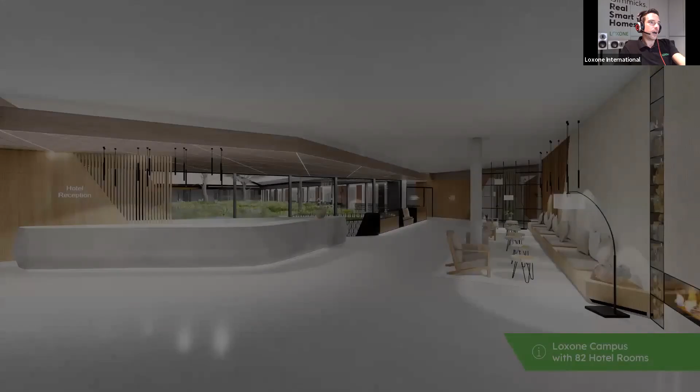As you can see, the nice hotel entrance, 82 hotel rooms. The auditorium, as you can see, is very large, 30 by 20 meters I believe, with a high ceiling. So it will be a nice project.

Other than that, Loxone is not only smart homes. You see smart homes beneath me, we've always done smart homes, it's our thing, we started with it. For us, it's tech, it works, we have the know-how, it gets updated every time - like yesterday you get new functionalities. But we know what the smart home is and what it needs to be.

But for years already, we're also busy with bigger projects - special or commercial projects. Hospitality: we had a hospitality release this year with some very nice products like the Miniserver Compact and the Touch Flex. So we have a solution for bigger projects like apartment buildings with maybe 100 apartments, or commercial projects where different smart homes need to communicate with each other - like this one, Tesla for instance. It's something they're putting together with whole grids of homes, and they all communicate with each other.

But you have nice projects like this, also multi-dwelling units, MDU units. That's the thing we've been busy with for a few years now, because not only those smart homes, but all those projects with apartments, they need a solution too. Why do they need a solution? They're being told by the government to reduce CO2, other costs, energy. You can't just make projects like that with nothing in it that's going to help a little bit for that energy or environment.

So this project here in Belgium, it's 10 kilometers from our office. It's 71 apartments, and all those apartments have their own mini server, and they are all connected to each other with intercommunication and also programmation. I will talk later, we have a function since a few months, it's called the multiplicator. So it means you make a program for all those apartments or apartment types.

There they have three types: one bedroom, two bedroom, three bedroom. They make a programmation for three bedrooms, they send it to all those 71, actually 74 mini servers because there's 3 for the buildings also. They send it to all the mini servers, it's programmed, and then afterwards they just check out the rooms. They can program all that project, a basic auto configuration, in like a few minutes for instance.

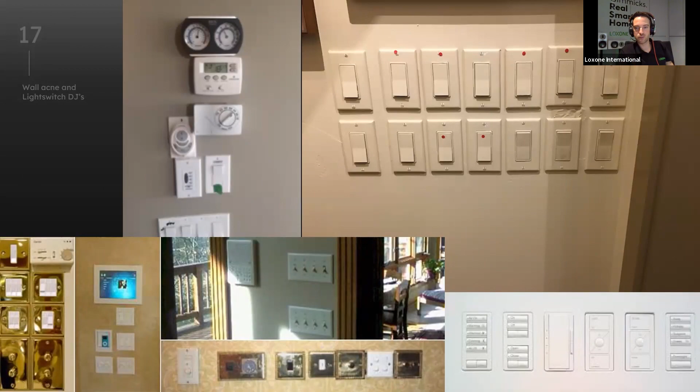You get these things, it's unbelievable. You get stuff for your climate control, your ventilation measurement. You get a lot of screens, all those buttons with some stickers on it. It's pretty nice - don't think so. You paid for a nice button, but you have to put a sticker on it. So we're not gonna do it like that.

The next thing that came on the market, that was version 2 smart home. And then you had the Internet of Things exploding. Also Alexa, speech control - you get all those companies that make standalone solutions for the climate, for your sun shading, alarm systems, lighting. And they all say, here is all the hardware, put it in, start it up, you get your app and you can control everything and you have the best smart home in the world.

Not. Again, if you have to take your smartphone, search for the app to control something or to change something, it's again not smart, in my opinion. So for us, we are the next step in that story, and that's the future of automation.

So we automate. We also have other functions like speech - you can do Apple HomeKit. But for us, it's an extra, it's a nice to have feature. It can be that you walk into a room and you have to shout to it to make the lighting go on - that's not our main goal. It will be there, the light, if you go inside. How? I will show you in a few minutes, about the controls.

I say automation, hey, everything works itself, you don't have to do anything, but a button is also needed. Also in a smart home, you need to be in control. You need to be the boss of your building or your home. But not in the way as we saw earlier with all those different buttons.

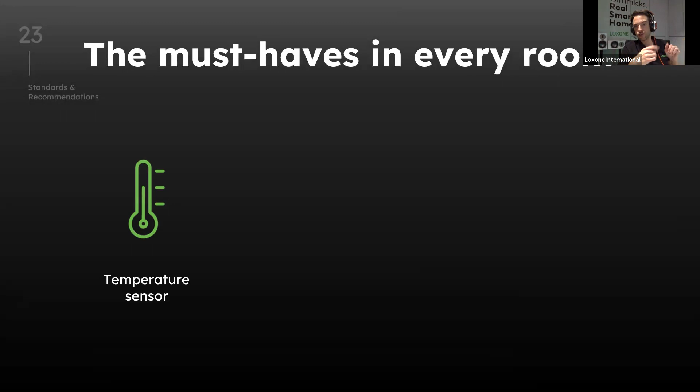So the must-haves, as I told you, we talked about the Loxone Touch. There is a temperature sensor in there, which is also a must-have for climate control. A presence sensor, as I said, in every room. We have door and window contacts, and we can add extras if you want, of course. But those three make the good base of a Loxone smart home.

If you put in all those things, the Loxone Touch is standard for easy control, climate, and safety functions, because the temperature sensor can also detect 50 degrees in a living room. That's not right, something is wrong, and it will give a notification in the app. So the presence sensor and door window contact, if you put it in, you have a good basic installation with more than 60 functionalities.

About the hardware, we move a little bit to this topic because I think it's also interesting.

I have a question: do you have a shut-off valve for the water intake in case of a water leak? In our own product range, we don't have a valve like that, but there is a solution. We've had it for years. I even wrote a blog about it with a small program. You just take a relay, put any valve after your water meter that can be controlled with the relay, and you have the solution. We have the fire and water alarm in our auto configuration. You just connect the relay to it. If the alarm goes off because there's water, it will close. Any valve can be 230 volts or 24 volts, it doesn't matter. With the relay, you can do everything.

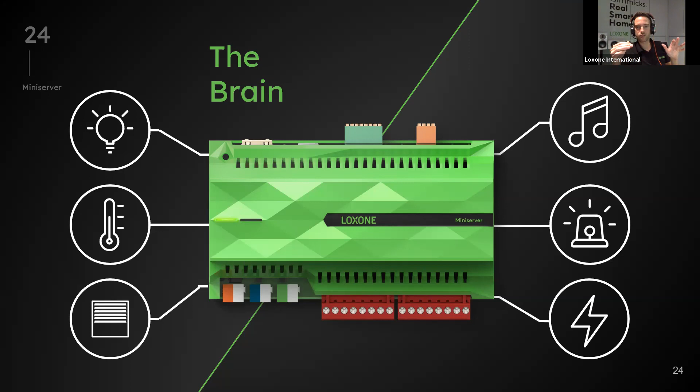So the Miniserver, the heart and brain of our system, has a lot of functionalities on board. We have connections, of course a LAN connection, because we need to be on the network to go outside to your app or programming from outside, and for updates.

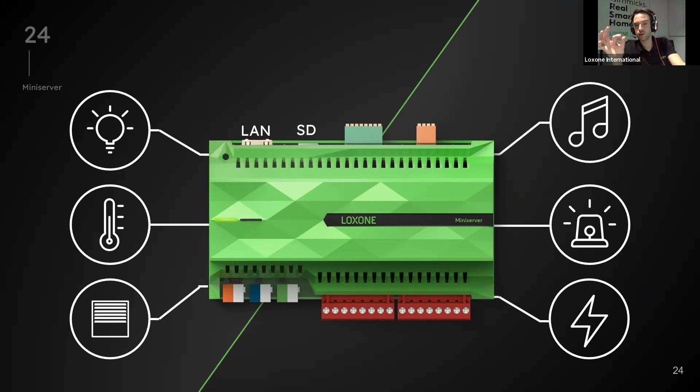We have the SD card where all the programming is stored, and digital inputs. We have 8 digital inputs and 4 analog inputs. The 4 analog inputs can be changed in the software to digital, so you actually get 12 digital inputs. These can be easy for window and door contacts that have to be cabled, like in a new home. If there's a design issue and they want contacts built into the windows, we can use those for triggering the alarm or other functionalities.

Another question: at the wireless connection level, does Loxone integrate with Zigbee or Z-Wave? No, we cannot natively integrate products from Zigbee or Z-Wave. It's around the same bandwidth, 868 megahertz, our own air signal, so it's a little bit similar, I think. But you can't connect those straight away. Why not? It's very difficult for us as a manufacturer to give warranties on other products from manufacturers we don't have a cooperation with. So it's very difficult, but there are other possibilities.

We have our own air products. That's the best solution, but in this phase we cannot do things like this if there's no cooperation. It's a hard part, then. We could do it, but it's just not possible. If you do more than 200,000 projects, and you need to give a warranty on some project to a client who needs a warranty, you as an installation partner want a warranty that it's going to work if you install it like that. So that's something we like to give on our products, our story, our cooperations. We can give 100% warranty, it's going to work.

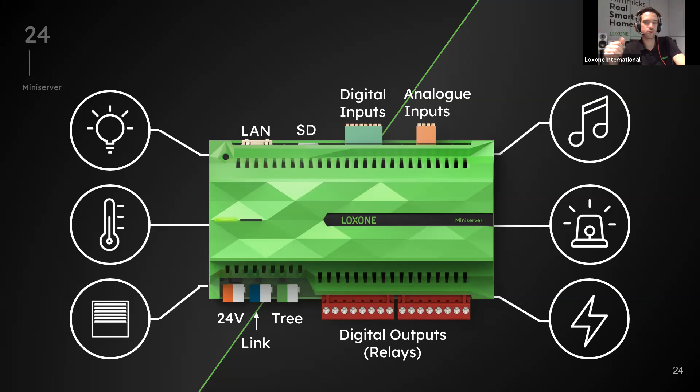We have the link, that's for connecting in-out extensions or other gateways like Modbus, RS485, stuff like that. We have our tree, it's for the periphery in the rooms itself for things like touches, sensors, our tree lighting, and this tree branch can already accommodate 50 products. So you can already do a lot of things with one mini server. It's also a Modbus server, the mini server, so Modbus TCP IP can straightly connect things through the network. So that's something extra you get. It's also HomeKit compatible. We're, I think, the only smart home manufacturer worldwide that is Apple certified for our mini server, HomeKit, and also for our audio server, Apple AirPlay is also certified. So that's the mini server.

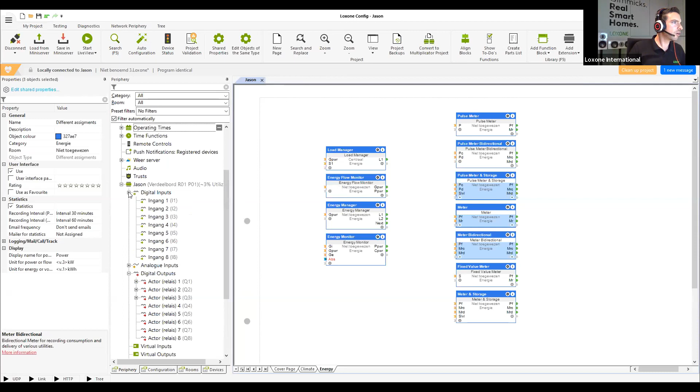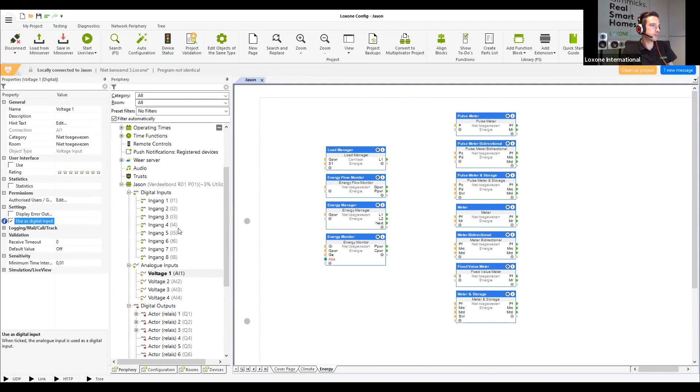Another question: how do the analog inputs get changed to digital inputs? That's very easy in the config software. I can show you fast, because otherwise later I'll maybe forget it. Let me show you very fast if I can stop the share. Where is my config? Okay, so this is the config. We have here our digital inputs, as you can see. You can also set it as a frequency counter and stuff. Then you have the analog inputs, and there you can use them as a digital input. Click it here, it's fine, like that. Save it in the mini server, and this analog input is a digital input from now on. That's it, easy as that. So let me take back, where is it here? So everything, if we make stuff like that, we make it easy. It doesn't have to be difficult like that.

One important thing also, we're not a cloud-based solution. Why is it important? It's for your own safety. It's a smart home, and all that stuff that happens in a smart home could go outside, maybe to a server. It gets saved there, leaks on the internet, privacy issues. We don't want that, we stay away from that. We don't use a server somewhere where we know everything about you. The other thing is keeping a smart home running without the need of a server somewhere else, because with a cloud-based system, if the server is down somewhere in another part of the world, maybe your smart home doesn't work anymore, or some functionalities don't work. So with us, you pull the plug from the internet, and the mini server and all your installation just keeps on working, because it's inside the mini server on the SD card. So that's cloud-free, it's important for our story.

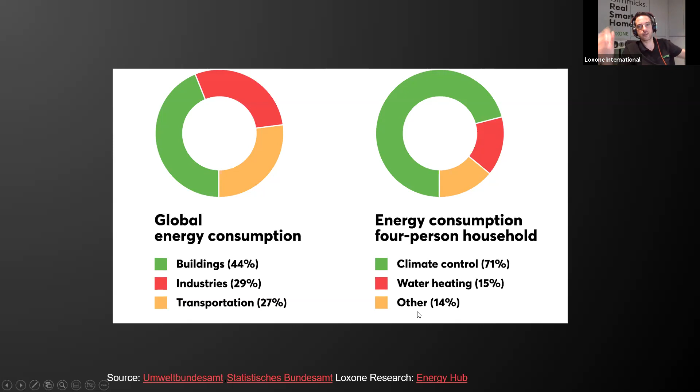Also the water heating, of course, for washing and stuff like that. Other things like multimedia, TVs, and lighting are included too. So here you can see more than 25,000 kilowatt hours per year in a four-person household.

Like I said, you can save a lot with water heating. A lot of installations in new homes are still built with boilers that constantly turn the heat on and off, especially when working with an outdoor sensor. It cools down in the evening and starts working, but the next day it's warm enough again, so it heats up for nothing—you lose a lot of energy. You can save up to 15%, and that's the 15% you actually use.

With climate control, as I said, you can save up to 50%. It's the same story with heat pumps, always going on and off. That's not how it should work. You need the heating to stay on but adjust a little higher or lower, not constantly on, off, on, off. It's also not good for the appliances, plus you lose a lot of energy doing it that way.

Other electric features—presence control, LED lights, lighting—you can save a lot there too. Especially our presence sensor is the main part of that story that will save you a lot. It sees what is happening in the smart home, in those rooms, what the rooms need, and it decides what is going to happen.

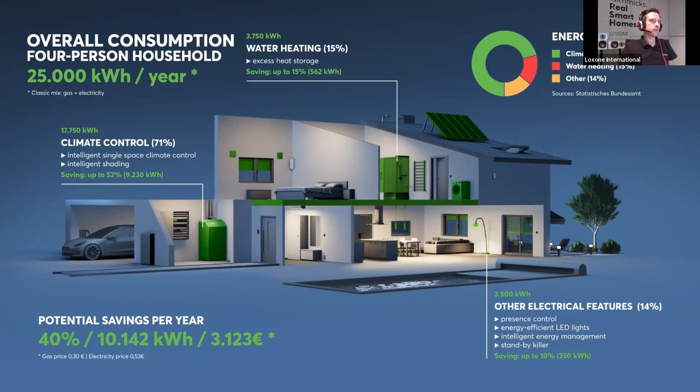Okay, so the energy management potential savings—again, you see here the climate control, especially the heating and also the ventilation. I don't know how ventilation works in your country. Some countries have room ventilation separated from each other; here in Belgium, they have a lot of central ventilation units with pipes in and out. It's a little different in each country or part of the world, but it always comes to the same thing: you, as a user in your home or project, don't know how to control it—somebody has to control it.

For climate control, you also most of the time have the heating, potentially cooling or aircon, you have your shading for your windows, and you have your ventilation. Those four, if they don't work together, it's like a boat where they row to opposite sides—they don't talk to each other. They have to be taken together, one captain on the boat, and it's going to work. So combining things like that, you can see a lot of savings.

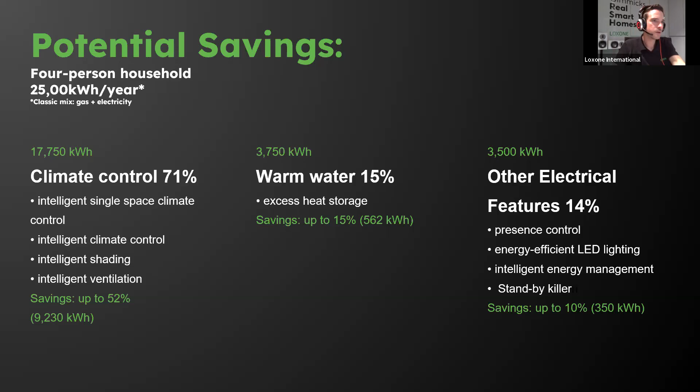With air conditioning, you don't always have to use it. In a lot of situations now, people always grab for the air conditioning and say, 'put on the air conditioning, it's cooler.' But with shading, you can prevent the air conditioning from being used. In the summer, it's automatic with the position of the sun, you can move the shading. The mini server will move the shading by itself, so you can cool down and don't let the sun in. So if you come home at night or in the evening, you don't need the air conditioning, because otherwise the sun comes in and it's 5 degrees hotter on a summer day.

In the winter, it's the other way around. If you're not home, the sun is on your big window in the south, so let the shading go up, let the heat come in, and you don't have to heat as much. So with the climate system, you can decrease a lot of energy costs.

The PV and energy management, photovoltaic panels, are also important these days. Almost everybody needs good PV panels. I don't know how it is in your country, but here in Belgium it's almost the normal thing that you do. But a lot of people don't know that you have to do something with it, because in a few years here, maybe even sooner, we get capacity rates here in Belgium. That means if you have peak power above a certain line, you will get extra charges.

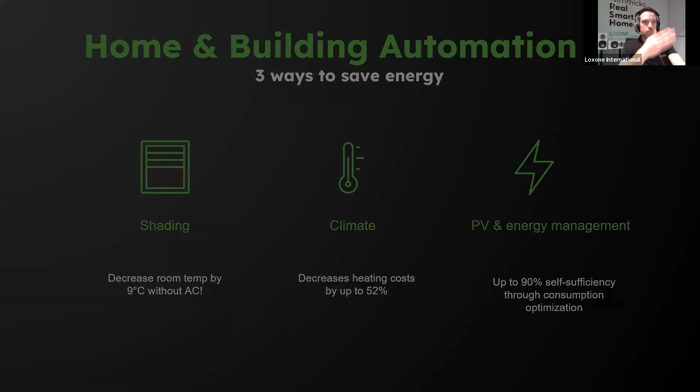For the climate, we have a few things to go through, and then we will do configuration for a few minutes. I have a question.

What is the difference between tree and link at the mini server? The difference is, I will show you.

The camera maybe. I'll stop this share. And I will change the camera.

We here have three components: a sensor, a touch tree, and it's connected to the tree branch, the green one. I don't know if you can see it - it's the green one, and it's made for connecting all those appliances or peripherals in the rooms. The link is the blue one, it's to connect the extensions, mostly they are in your electrical cabinet - like a tree extension, an airbase, an RGBW dimmer.

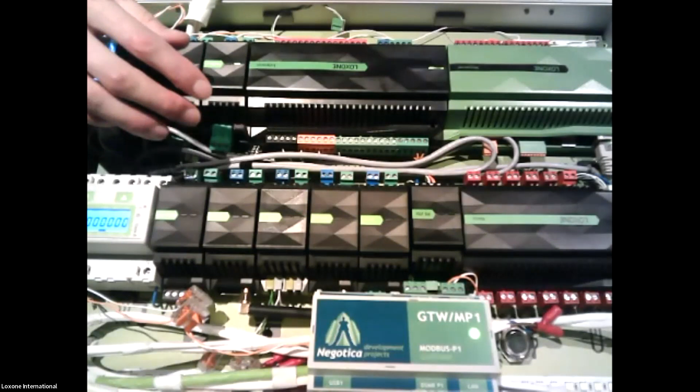Or in the other case, we have other extensions like Modbus, DMX, RS485. We also have here an EnOcean, one wire, RS232, so they are all connected also with the blue one through the link. The blue one is the link and it goes to the mini server - it's the blue one here. So that's for extensions, and tree is for peripherals in the rooms.

I hope that explains a little bit more. Wait a minute. Okay, I'm back.

There it is. Okay. So it's a different cabling, and it's a different circuit also.

Another question: how is the PV energy data from Victron devices connected and displayed to the Loxone user interface? Victron, we had testing with it also here in Benelux. I believe it's through Modbus, and otherwise it's a network communication. In our Loxone library, you will see - I'll put it in the chat, let me check, so you can look at that. Where is it?

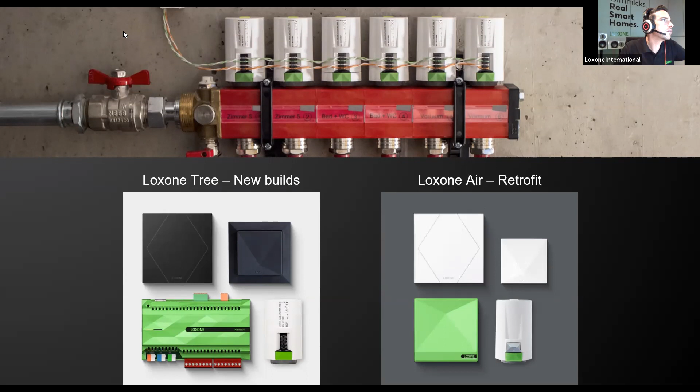Okay, Loxone library. I put in the chat the link to the Loxone library.

If you go there, you can see a lot of other manufacturers for inverters for PV panels or batteries. They are the most easy ones because we know about them and we have a template for it.

I don't think Victron is in it momentarily, but I know it's possible to connect it. It's just that you don't know much information about the manufacturer, so you have to search a lot. But there are already a lot of other brands, the bigger brands, in our Loxone library database.

So from our side, we can do everything. We can connect everything if the other company, other manufacturer or product can do it, then we can do it also.

But how? That's the main difficult part. You have to see how hard it is to get the right information from that manufacturer. Did they write a manual with all the commands I need? If it's not clear, it's going to be a problem. Will that manufacturer support it? Will they update it? Stuff like that is important to know.

Another question: does the owner have rights to do his own programming? That's something you have to discuss with the owner itself. We don't have anything to do with it.

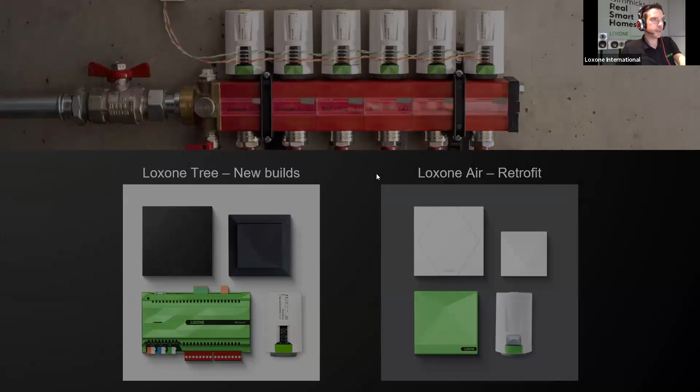For heating, climate control, and boilers, you can make the installation in different stages. You can start with climate control, intelligent room control, and say I have the valves, and it will work like that for radiators, and not do anything with the heating source. That's possible, but the best thing is you can control the heating source too, through a relay for a boiler, analog for gas heaters, or Modbus network for heat pumps - very different ways. You can also use a mixing valve controller to control the valve, for instance if you have different manifolds or stages - first floor, second floor, third floor. You control those valves, and it starts in the room with the intelligent room controller. Then you have temperature control for the valves, for instance if you have a boiler or other stages, like I told you. The climate controller is the end boss, the decision maker. He sees what's happening in all the rooms, takes everything together from what is being asked where, and decides whether there will be cooling or heating. That's how it works.

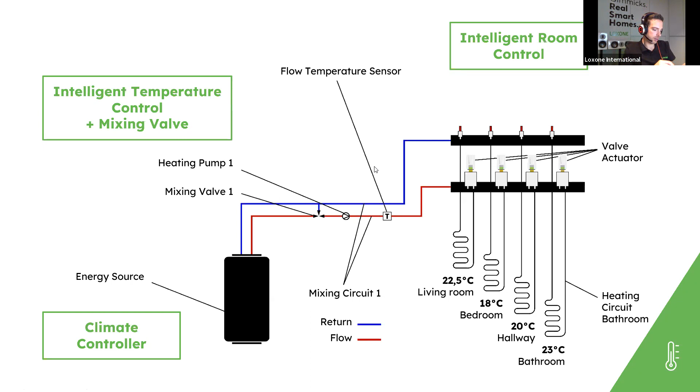Another question: can you see the battery level on all air devices in the app? Of course, that's part of our diagnostic functions. You can go in the app, press air, and go to battery - air status monitor - and you can see all the air devices. Standard, you get notifications at 20%, you need to change the battery, and it keeps reminding you until you do. If it's gone, you'll get a notification that it's offline, and you have to do something about it. It's standard, like a car - if it breaks down, you get a dashboard notification, a light. That's what happens. For a smartphone we think it's normal, but it's not normal in other smart home or domotics worlds. I don't think other companies do that as a standard notification, but with us it's automated standard inside.

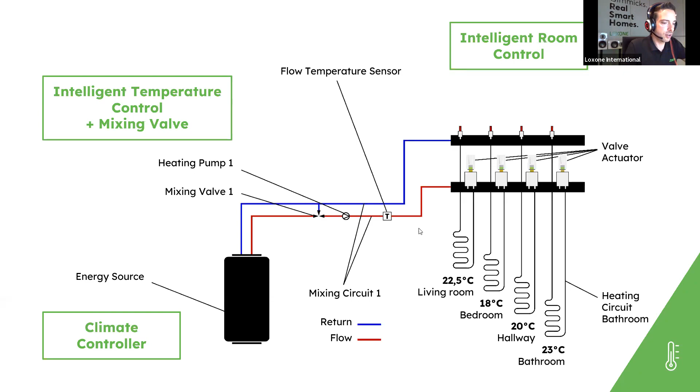So that's about the heating. Shading - very important, especially for climate control, but also for energy - it's actually the same concept. The shading works based on where the sun position is - is there sun, yes or no? The touch device in the room measures the temperature and tells how hot or cold it is, and then we decide if there's someone in the room and what to do with the shading, up or down. You can even use slats, moving them a little so you keep the sun out but still let light in - that's also possible.

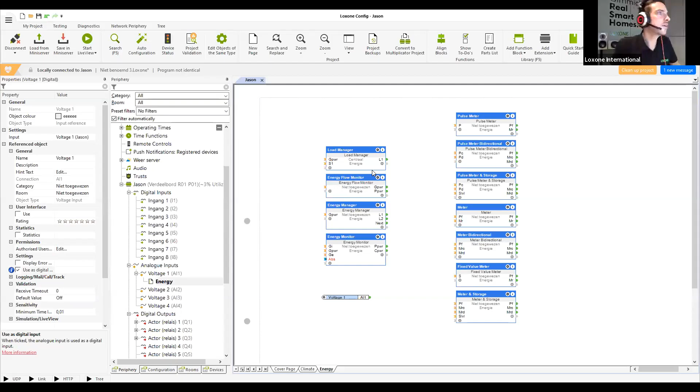So in the configuration, we can use it like this. Maybe I'll take a config with me for a minute, let me see - stop share. Where is my configuration? Config - so we see the config. I have a few blocks here.

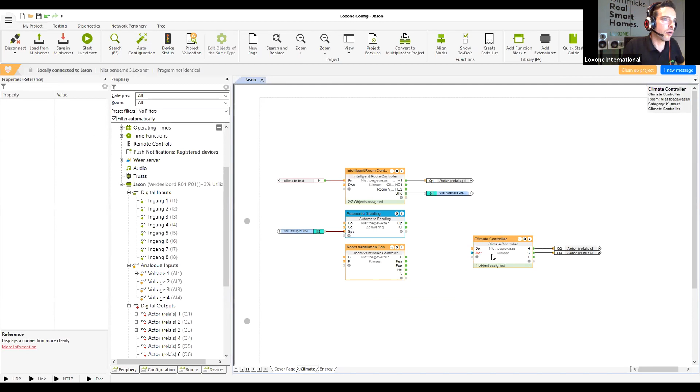So you have the automatic shading, and you see I already connected it to the intelligent room controller. I'll go through this in a fast way - I'm going to explain how the climate control works in a Loxone smart home. That's the end boss, as I said, the climate controller. He will decide if it's heating or cooling.

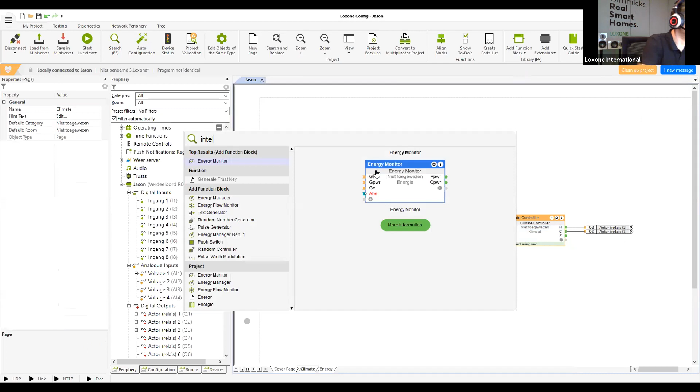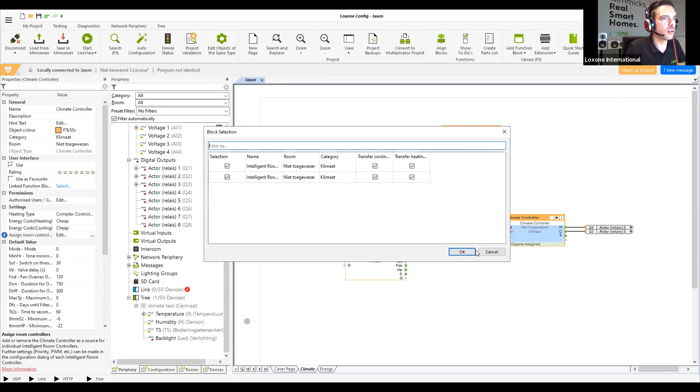You can do it with a relay, but also with any sort of language - Modbus or IP - whatever type of heat pump or system is behind it. If you click it, you see how many intelligent room controllers you have in a smart home - all the different rooms. We now have an example for one room, and it's this one being added to this climate controller. If you have more, you add another room - I'll do it just like here. Okay, like this. Now if you click here, you see it's this one from another room. I'm not going to change all the names now, but like this, you have all the intelligent room controllers talking to this intelligent room controller - sorry, talking to this climate controller.

And then we're going to add an automatic shading block. The shading has an input to have the sun position automatically start. This is connected to the room controller. We're in the room, the shading is in that room, and we have the function where you can say if there is the need for automatic sun. Shading demand will say it's too hot, there is shading demand. Then it will set the automatic shading in action on the shading block.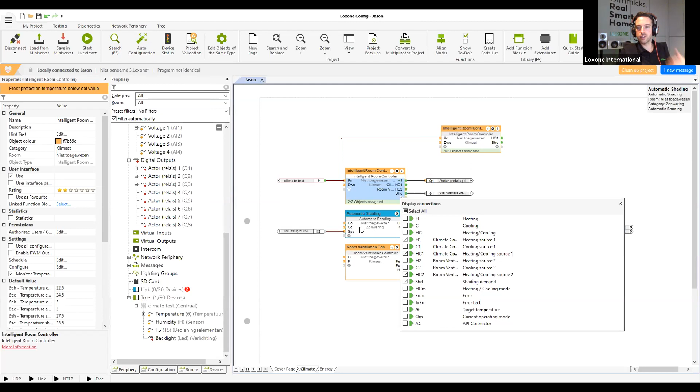So it depends what temperature, whether it's too cold or too hot in the room. It will say it has to go down, of course. If the room controller says in the winter it's too cold and it sees there is a lot of sun coming on that window, it says okay, start, and it goes up like that.

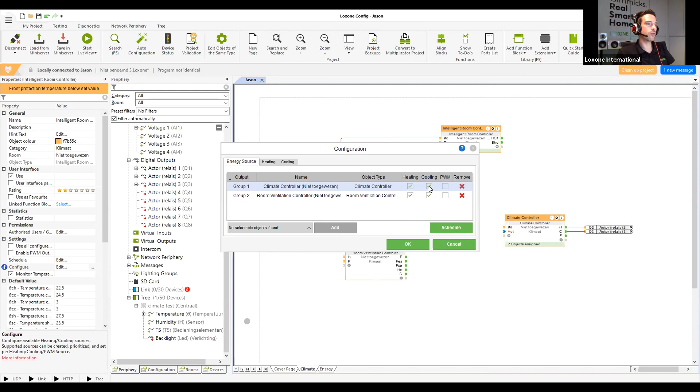Then we can also control the room ventilation with the room ventilation controller. You can add it, and you can also add it to this intelligent room controller. So it's also taking in control of the ventilation, not only the shading but the ventilation and the heating. It's one complete story. You can also put it here like you can do heating or cooling, or only use the ventilation for cooling, for instance. At night it's going to do cooling. You can choose everything like that, but it's all linked together.

This room controller has then, for instance, a valve, 3-valve, or here's a relay, but you can add 3-valve. I'm going to show you in a moment how you have to program it in the right way. This is just an example of how the blocks look.

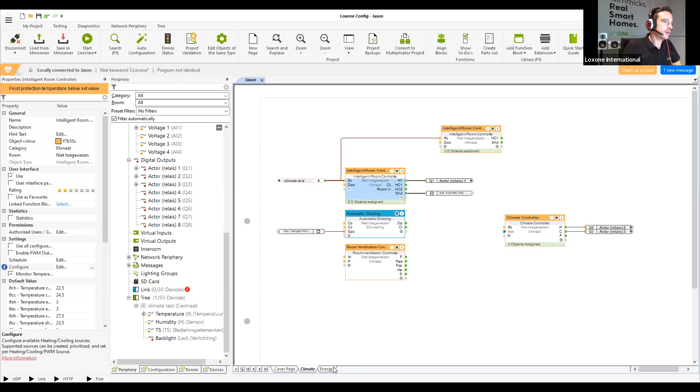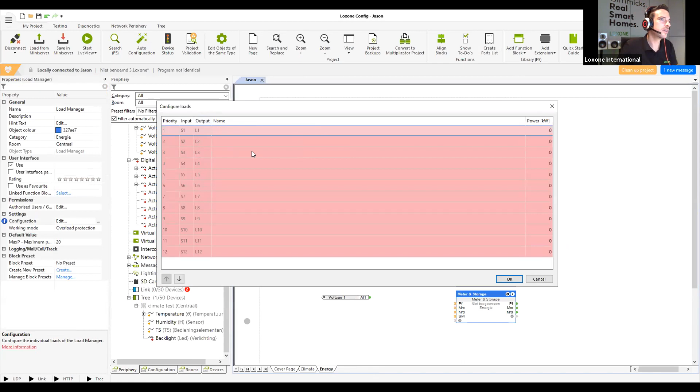Also for energy, these are the new meters I've been fiddling with for our energy release. You have a lot of meters you can use with a lot of functions: bidirectional meters, meters with storage, energy flow meters. We have that load manager. If you click it, you can put in priorities. That was the word I was looking for earlier. What's the power, which output does it use? You can use it here, and you can lock certain other less prioritized products or appliances.

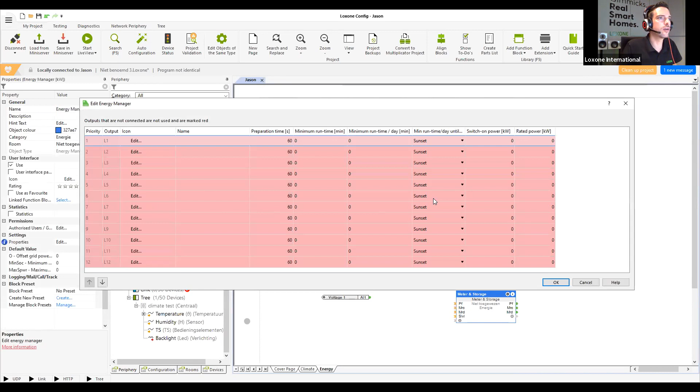Energy flow monitor. We have an energy manager. We can also manage how the energy has to go, has to flow. Energy monitor: you can put in your production, your grid energy, the storage from batteries and see it visualized in the app - what the PV panels are delivering, what you're sending to the grid, what the battery is doing, and how it goes to the appliances. You can easily see what's happening.

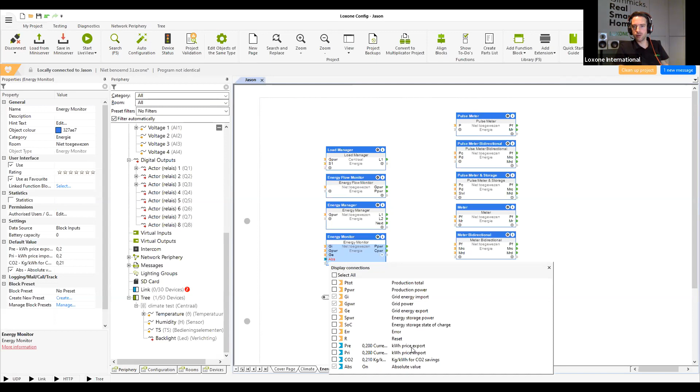In the background, Loxone will do its thing, and it will say if there is enough production from your PV panels - say your dishwasher is ready, you loaded it, all the dishes are in there, and there is enough production, your car isn't there, you're going to work - there is enough power, put on the dishwasher. If you come home at night and there's still a little bit of power, you plug in your electric car. It will also take into account what power is available like that. So you can easily save a lot of energy this way.

With those new blocks, it's going to be much easier to implement energy management like this.

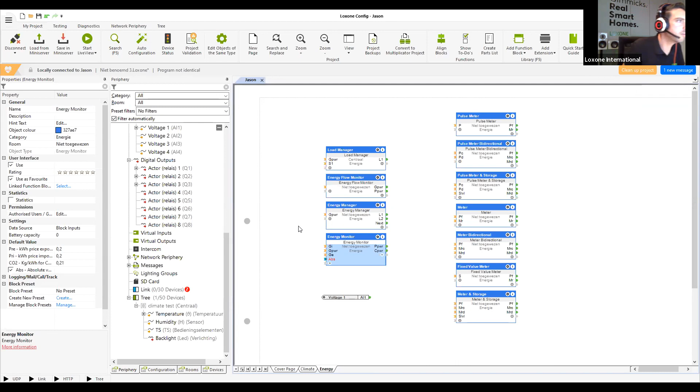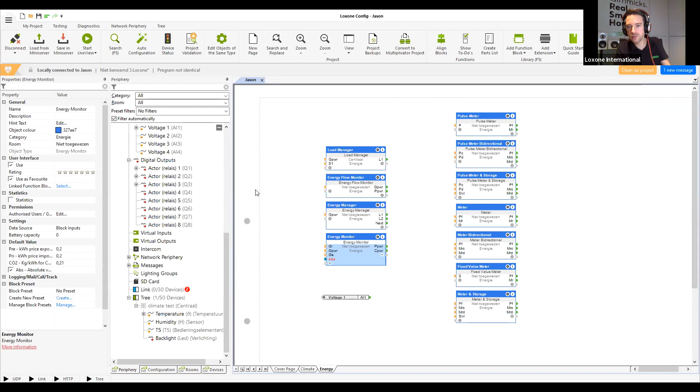Let me see what I still had to talk about, because maybe now it's the best time to show the config a little more. So how do you program a smart home? We have our Loxone standard, as I talked about, and we have an auto configuration. Together with the project planning in the config, you can make a smart home, plan it, program it, and make it work in less than 10 minutes. The programming itself takes less than a minute.

I'll show you how it works. So we have our config. This is a standard, but I'm just going to go to the project management. We have here our project planning. You have to read it yourself, it's too long to read, but there's some explanation of why and how it works a little bit. You fill in the name - international webinar - and you have your other credentials.

I'm not going to change all of it. You can choose whether it has to display prices, yes or no, and what currency. What Miniserver do we have? We have a normal Miniserver in our demo case, so I'm going to choose that one. What do we need for controls, lighting? That's basic - what's the main thing that's going to go in that smart home? So we choose a touch tree as we have it in our demo case. I'll show, maybe it's better - put the camera on the demo case.

So we have a touch tree white, a presence sensor tree white. You can choose flush mounted also, but we have the normal one. LED spots, you can choose other lighting also, dimmable outputs, but here in our demo case we have a LED strip, though I'm going to show you how you change it, because here we will take LED spots as a standard. Nano 2 relays for shading.

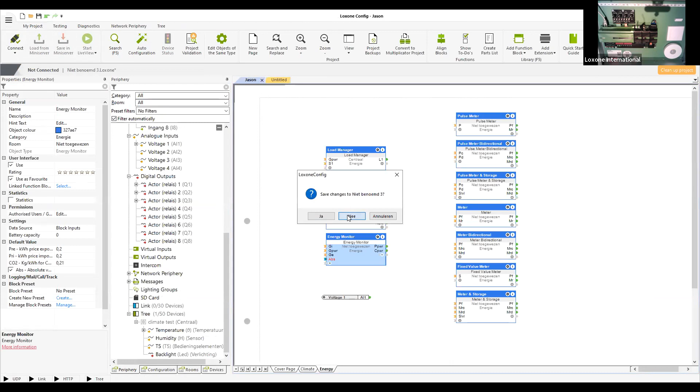So first we will close this for a minute. Disconnect, that's my other program. Nope. So first we're gonna look for a Miniserver. That's my Miniserver, we will connect. We are connected with the Miniserver. You can see here it flashes. I know that's the Miniserver.

So if we are on the Miniserver and we go look for extensions, you will find those extensions here already learned in. So here you can see it already had all the components on the branches in light gray, as I made my project planning. See? Also linked it to the right rooms. As you go search here, you can see it already had all the components linked to all the rooms.

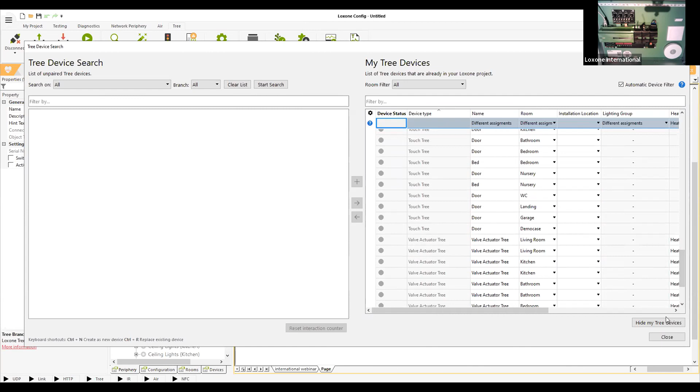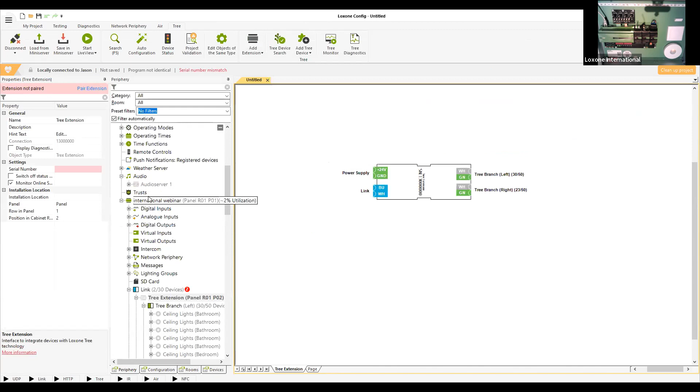Let me see if I can find the extensions. Why is it not... Okay, well, doesn't matter, because I was in the other program. But as you can see, it connected everything like it should be.

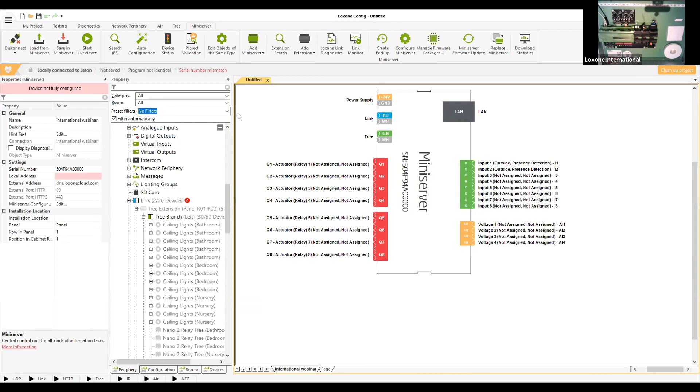What you can do now is learn in all the devices. That's the most work, or the biggest part. You have to walk around, you can see visually where it is, you can hear an audible click signal from the touch. And if you learn in all the devices, the only thing you have to do is the auto configuration. If you do the auto configuration, it will also show you a disclaimer. You can choose to have all the functions, more than 60 functionalities standard.

They're all here. We have an alarm system, we have sensors, you get the alarm system also. I'm going to change my camera again, maybe nicer. We have wave functions, central functions, fire alarm, leave the house, everything. We go configure, press it, we wait.

We have another question: can I use the touch nightlight as a temperature sensor for heating? No, it has a temperature input. You can use another temperature sensor to put in there and show the temperature on the touch nightlight, but it's not a temperature sensor of itself. So you can't do it like that. You need a touch, or a temperature sensor.

So, configuration - oh, we're finished. You saw it's 30 seconds to finish, and you can see what we get from the programmation. It made all my rooms.

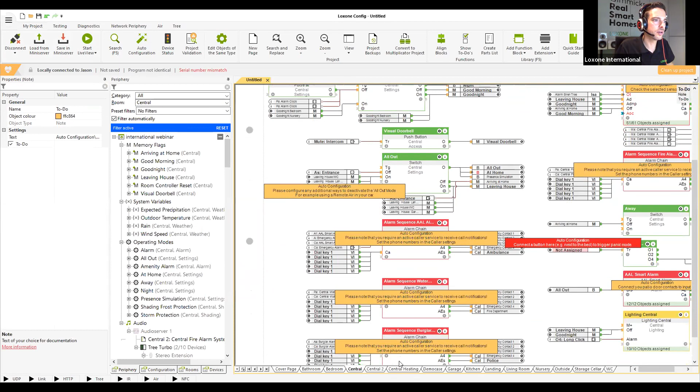We have a central page with a burglar alarm. We have a night mode, alarm sequences, away mode. Central 2, we have automatic shading for central, audio central, the heating. It made a climate controller with all the intelligent room controllers, temperature controller.

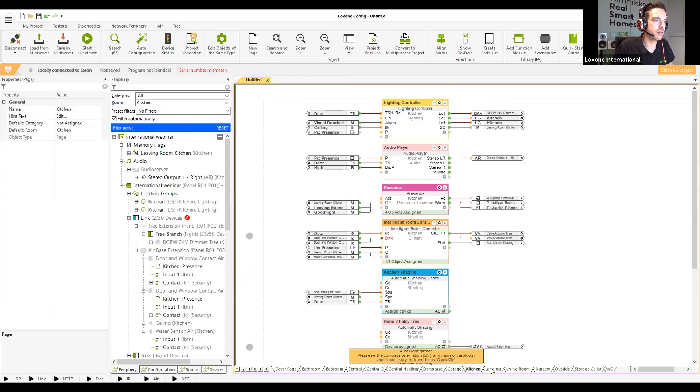We have our demo case with also all the functionalities in it, presence blocks, and you see every room has all its needed functionalities, all its temperature sensors, buttons, touches, valve actuators, lights, stereo outputs for audio. Everything is already connected for the shading, and every room is finished.

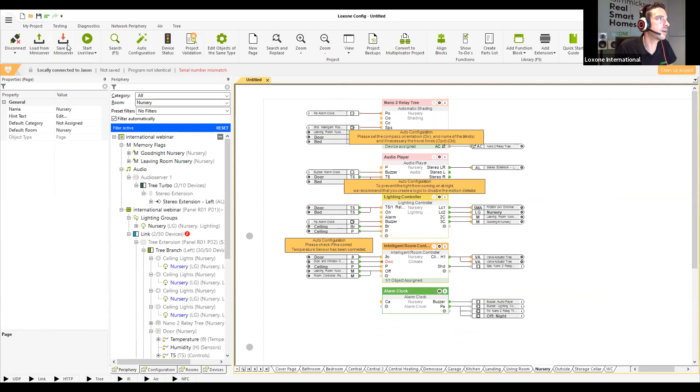The only thing you have to do is save in Miniserver, and the programmation is in there, and your smart home will work. It's basic, it's more than 60 functionalities. Your climate will work, your lighting will work, your shading will work, and you can build from there if you need other specific things.

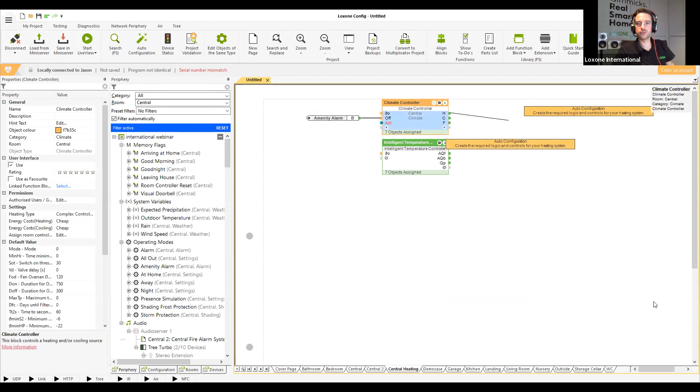Like making the connection with a Modbus controlled heat pump, you will make here on the climate controller - you still create the required logic controls for a heating system. So heating, cooling, something has to go here to that heat pump. There you can use, for instance, a Modbus template from the library or from the manufacturer with a manual.

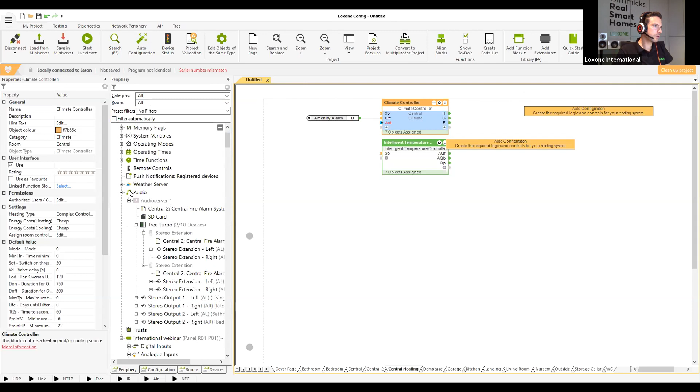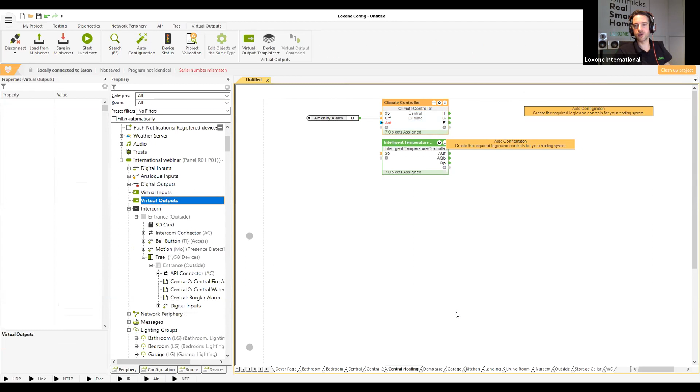You can create network devices. With virtual inputs and outputs, you can connect almost everything that can go over the network like that. Sometimes I struggle to find the right words in another language.

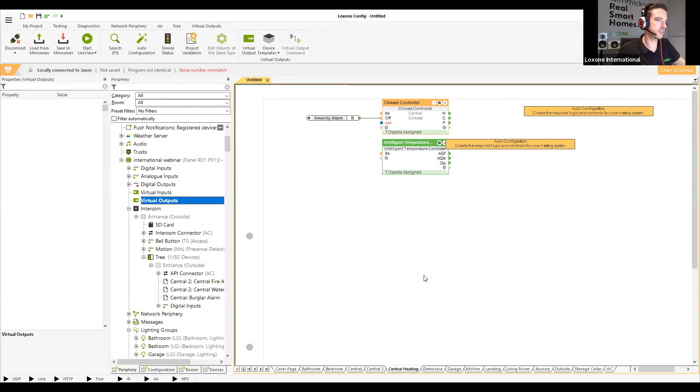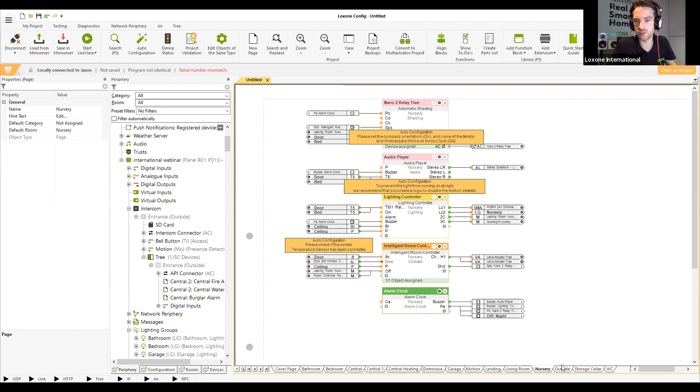But like this, your smart home works. So that's the power of our software. You don't have to make everything yourself, or sit down with the customer about how it has to work - no, just put it in. It's the auto configuration, Loxone standard. You can give a warranty, it works perfectly. We know it for more than almost 13 years now.

So that's a little bit of config, so you have a little better idea about how that works. We go back to our PowerPoint - we had a little bit of this. Let me see if I still have questions. No, okay.

So next thing, ventilation - already had a little bit about that. It's heat recovery also. It's not only ventilating, but you can recover a lot of heat, especially with systems that often have heat recovery, where the heat goes in and then the other air goes through a certain... it's like a mesh. The air goes through and it recovers the heat.

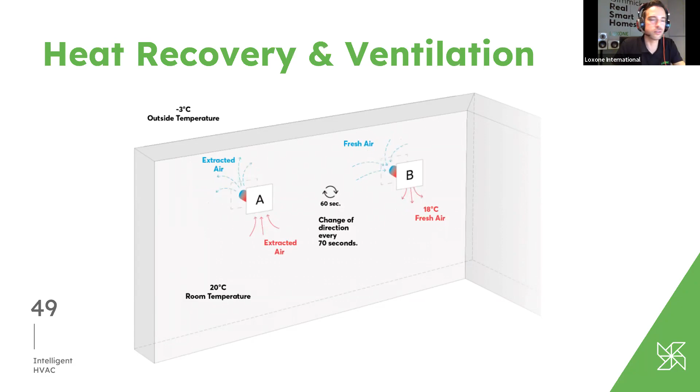So there's a lot of savings you can do with it. As you saw, you can connect it with all the intelligent room controllers to make the ventilation even better integrated. For PV management, energy management, as I already said, you can...

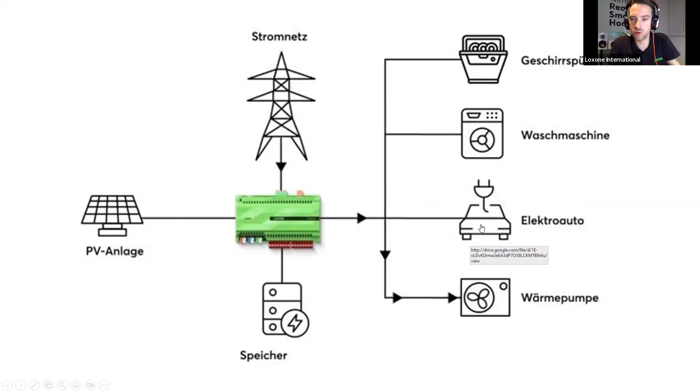Implement all the needed appliances for it. You have your PV, you have your battery or other things like that. You have the net, the grid, and then your appliances - your heat pump, electric car, washing machines, dishwashers, like that. And there, the Miniserver will decide what's going to happen with them, and with the load manager, which one will be the first, or the one that gets the most power.

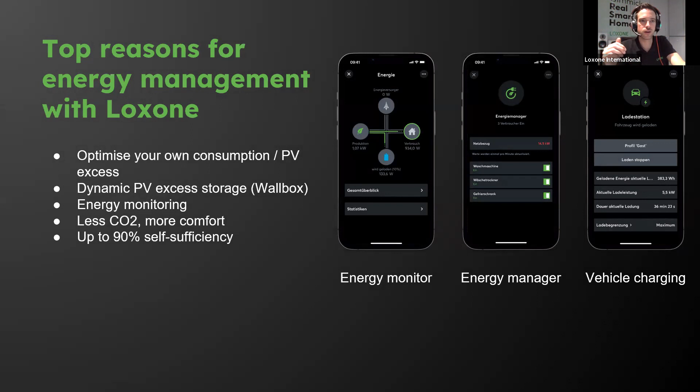So what are the top reasons? You can optimize it in your own custom way also. You can change everything in the app, also with the load manager, you can change it. You can monitor, and you save a lot of costs by implementing energy management.

I was a little bit ahead, but I think otherwise we would have lost a lot of time. Project planning we did - also told you, you need to make a total smart home. You don't only look at the products and the hardware, but you need to present the features. As you saw in the auto config, you get more than 60 features as standard.

Nobody has to make those features because making them costs a lot of money. People don't realize, but who will pay the bill in the end? That's the end customer. So if somebody is making programmations for a week, somebody has to pay for it. In our story, it's 10 minutes, then you have all the functions. So you can present features. People are willing to pay for more features. So that's how you have to convince people to go for a smart home because you get much more for the same money, and in our story, for less money. So it's very efficient, easy to use.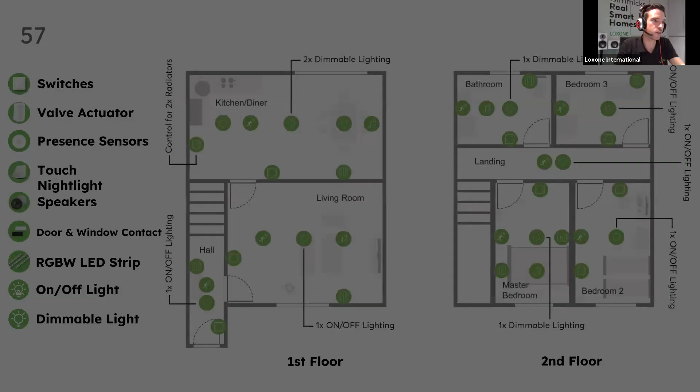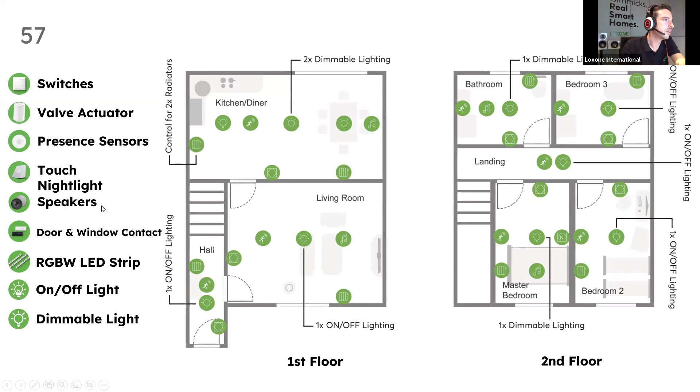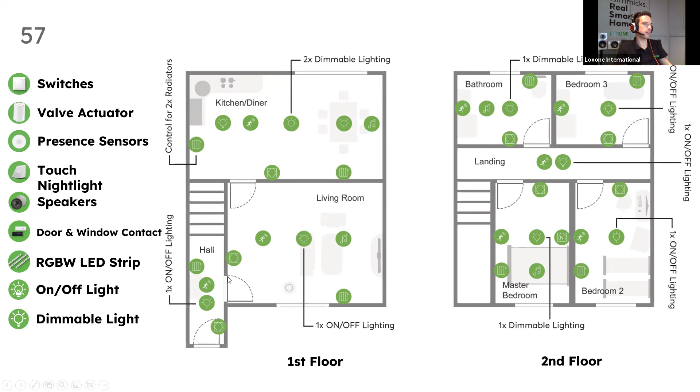So you saw the touch button. Privacy is important in our story also. This is another example about how you can make a building. You have the switches, valve actuators, presence sensors. You have even a touch nightlight. Speakers, music, audio is also very important. Not only to play music, but also for the alarm system, text-to-speech notifications for assisted living. Here in the Netherlands, we have a lot of projects with assisted living for elderly people or people that have less mobility. So you can have notifications, but it's so much more than only playing music. The door window contacts, LED stripes, normal lights, you can combine it as you like, of course.

Okay, I think that was about it. I went a little bit over time, but I hope you had a lot of information where you can do something with it, and you understand a little bit who Loxone is and what we're doing, especially on the energy level. We have a big solution, a very easy solution also that doesn't have to cost a lot of money.